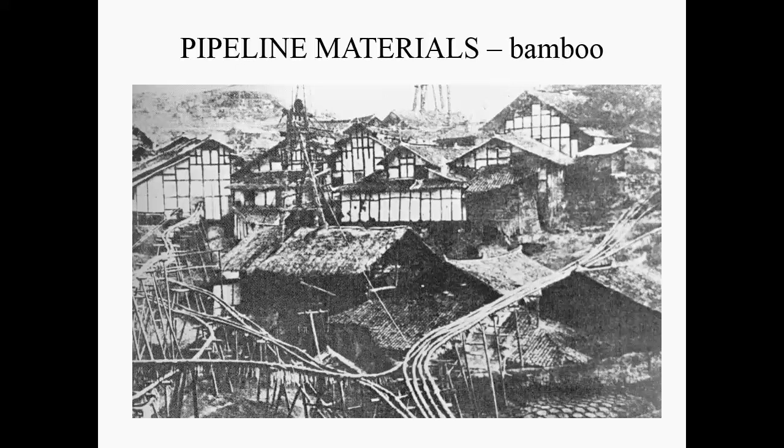Pipelines aren't new. I looked for the oldest picture that I could find, and this one came from a Chinese application a long time ago. This is actually water pipes rather than gas pipes, but it's bamboo joined together just by inserting one hollow section into another. You could make very long pipelines, a kilometre or so. The size of the pipe is just dictated by what you can grow. Bamboo is a very fast-growing plant, so you can get quite large tubes, but large meaning 40 millimetres or something like that. It's not going to be incredibly large.

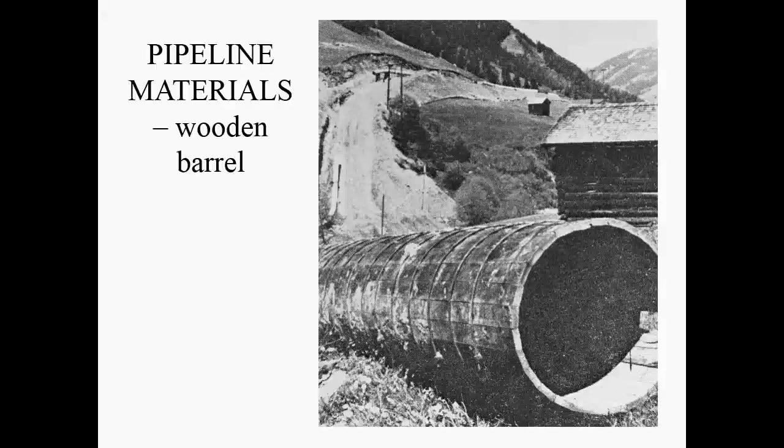The big change to pipelines really was the use of steel. The reason we could use steel is that people learnt how to join steel pipes together by welding. There were cast iron pipes, particularly in the water industry before that. Cast iron is a strong but brittle form of an iron carbon alloy, whereas steel is strong and ductile. You can't easily weld cast iron, so joints tended to be bolted or screwed together, which made it a very slow process for manufacturing a long pipeline, whereas steels can be welded. Steels really started appearing about 100 years ago, and for pipelines at least 70 or 80 years ago, so it's been around for a long time.

But the steels have been developing over a period of time, and what I want to do in this first set of lectures is really talk a bit about how the steel developed, the processing necessary, and how you would develop a material which can then be manufactured into a pipe.

Before 1960, pipes were made from what we call semi-killed ingot cast steels. What that basically means is a technical term for a bit of oxygen left in the molten steel, which was left there because it improved the yield. What happens generally is, if you're reducing iron ore in a blast furnace, you have to take iron oxide and turn it into pure iron. If you spend a long time getting all the oxygen out, you had to wait longer for the furnace processes to take place, meaning you produced less steel per day. So if you decided you could live with a small amount of oxygen in the steel, that would mean you were more productive.

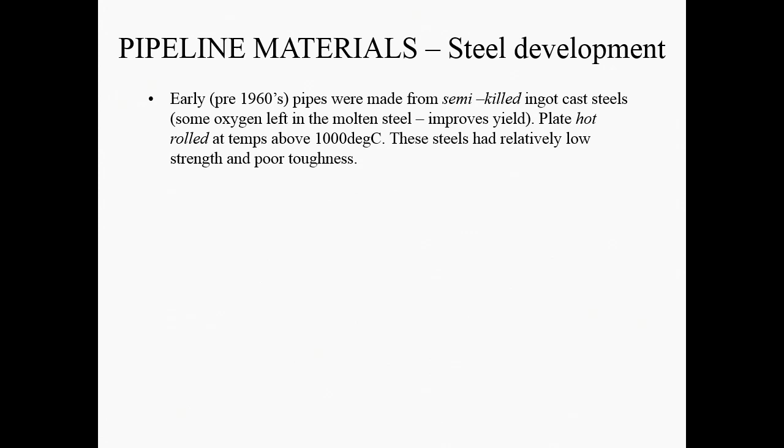Although these steels were better than the other materials being used at the time, they still had relatively low strength because of the hot rolling process and relatively poor toughness. So they were easy to fracture because of the oxygen left within them.

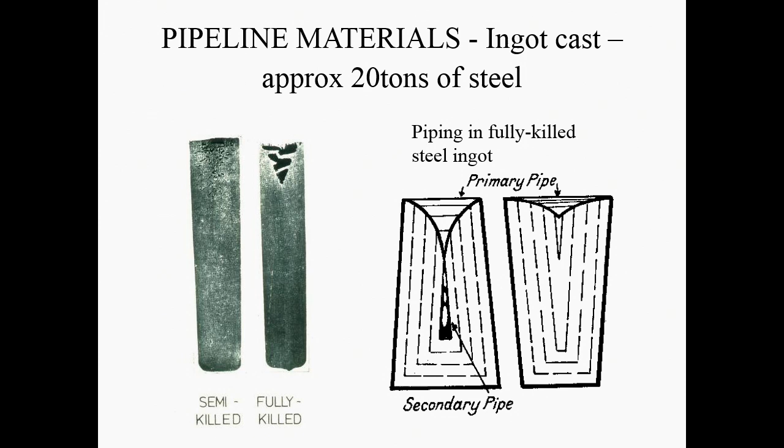You can actually look at these defects, and metallurgists discovered over 100 years ago that if you took a cut section of surface and polished it to a mirror finish with various silicon carbide papers and diamond grits, and then applied a very dilute acid, sometimes an acid in alcohol, you could actually reveal the structure of the material within the ingot.

So what's segregation? Well, in the steel making process, you have molten iron, but it has things like sulfur and oxygen in it, and manganese is added in the steel making process, so you get things like manganese sulfides and manganese oxides and iron oxides trapped within the material. If they were kept in the liquid phase long enough, they would float up to the surface because they're less dense than molten iron, and then they're scraped off in a slag layer.

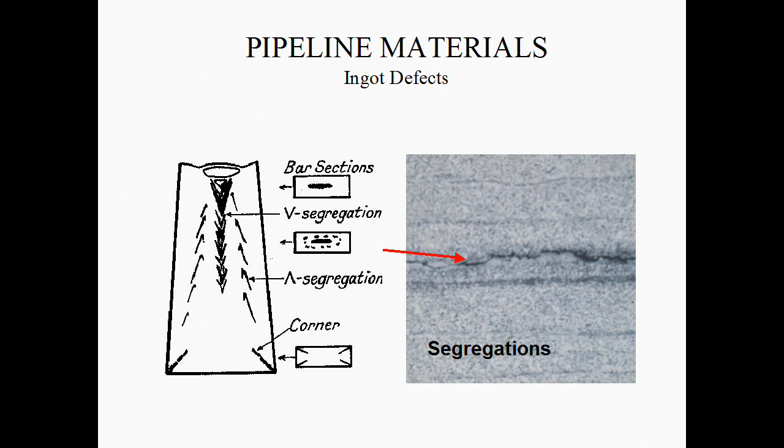So by the 1960s, the quality of steel was recognised as being not good enough because of all of these things left in the steel. And steels were fully killed: to get rid of the oxygen in the steel, rather than relying on the manganese which had originally been used in the steel-making process, small amounts of silicon and aluminium were added. They remove both any excess oxygen, and then they remove nitrogen that might be dissolved in the system.

So to reduce the carbon content of steel, sometimes an oxygen lance blows oxygen at the surface of the steel, and it oxidises the carbon to CO2, which is removed. That's how you go from an iron with lots of carbon, 3%, to a steel with 0.1% carbon.

But if you've got this oxygen lance, you can actually entrain other things like nitrogen into the steel, because it's not 100% oxygen - in some cases it's air that's blown there. And you need some way of dealing with the nitrogen and the remaining oxygen in the system. Silicon and aluminium form very stable oxides - they're very thermodynamically stable, so they will gather up the oxygen quite nicely. Aluminium and silicon also react with nitrogen to form stable nitrides, so they can be reduced by that method as well.

So this is done in the melt, so that by the time you get to casting, or continuous casting - and we'll talk about that later on - the properties of the material have been greatly improved.

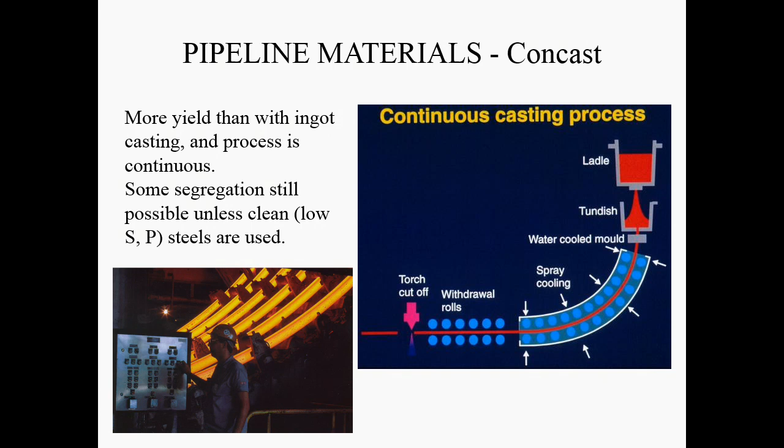So we had continuously produced material of fully killed composition, good strength, but the weldability needed to be improved. So what could we do? Well, from the 1970s, what are called controlled rolled steels were developed.

Controlled rolled doesn't mean rolled at fridge temperatures, below room temperature. It means that hot rolling was over 1,000 degrees C, controlled rolling is less than 1,000 degrees C. So it's cold by molten steel terms, but not cold by normal terms.

A silicon-killed, aluminium-treated and microalloyed steel, usually with niobium or vanadium, was rolled at temperatures down to 700 degrees C. By rolling these steels, you can continuously refine the microstructure and make smaller and smaller grains. These have very high strength and good toughness without having to add large proportions of alloying elements. They have microalloying elements, less than 1%, but not large amounts, which means the carbon equivalent goes down, so the weldability is improved.

So a pipeline steel is not a pipeline steel. A pipeline steel has been continuously changing over the years and will continue to do so, even if it has a particular strength, because the processing of that steel to get microstructures that deliver the good strength, toughness and weldability we need has been changed continuously.

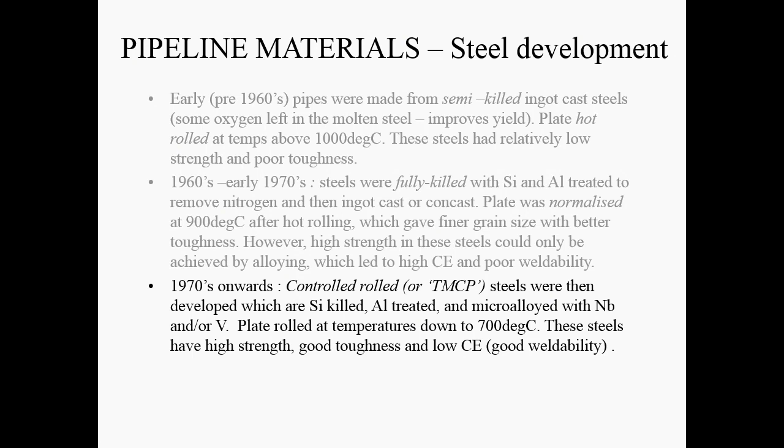And most recently, the hot rolling process has been controlled, the controlled rolling process has been controlled, and we have even put accelerated cooling by extra water jets on the surface to do it.

Hot rolling mill, huge mill. So there's a horizontal roller here and a horizontal roller here. Well, here and here, in fact. And then you can see the plate coming out. So that previous one was a slab. This is a plate. Slabs are about this thick. Plates are about this thick, or less.

And it's big, and it's dirty, and it's messy, and it's heavy engineering.

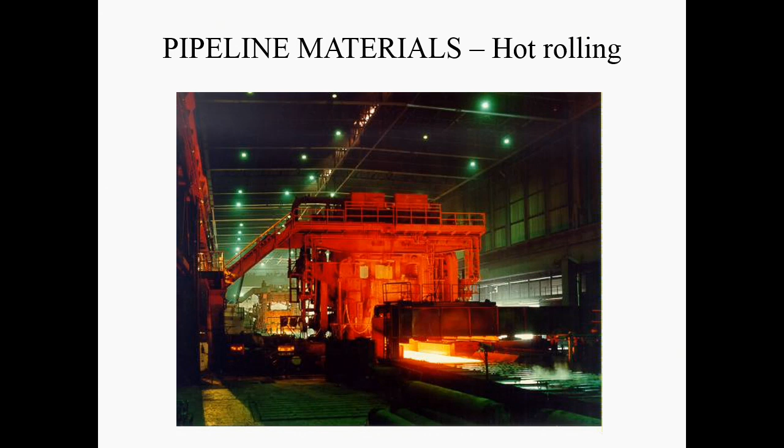So here's the typical process for controlled rolling of steel plate now. You can see we've gone from a single casting and single hot rolling operation to a multi-step operation. Basically the metals industry worldwide has improved process control and added to the complexity so that the microstructural control of the steel is what's needed for the application. You're trying to make a material with exactly the right microstructure for that particular application. That's what metallurgists have been doing really since the 1950s, but the improvements have been gradual over that time.

So we start with a steel slab, about this thick, at least 150 millimetres thick, 6 inches in old money. The slab is reheated to 1200 degrees C, so furnace treatment. How long do we have to heat it? Well, we have to make sure the whole slab is heated, so there's a certain soaking time that you need to put on. Then it goes through hot roll systems.

I've done a cartoon of the grains here. Individual grains are approximately spherical. In the steel, it's made up of individual crystallites with different orientations. The grains are quite large because at high temperature the grains tend to grow.

Hot rolling reduces the grain size. If you put mechanical damage into a material, it reduces the grain size. We get recrystallization events taking place. And we want to have a material with a small grain size because that's a good way of introducing increased toughness and increased strength.

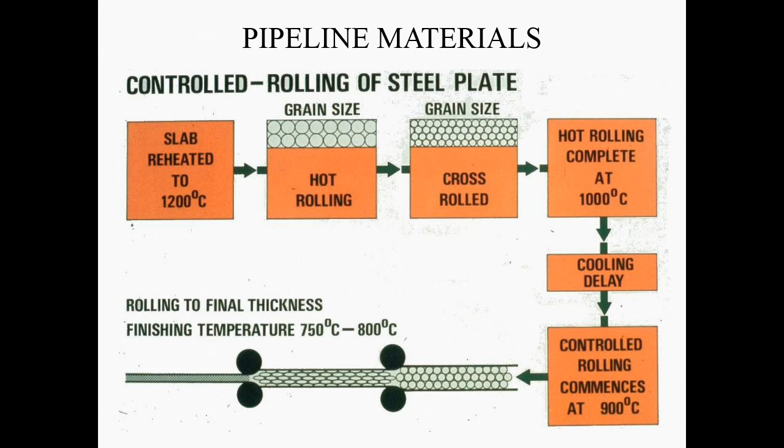So, from the 1990s, to get the high strength steels, that's X70, X80 and higher grades, we needed to controlled roll and fast cool the plate by water quenching. These are sometimes called accelerated cooled steels.

Basically, if you leave a steel at temperatures of 500 or 600 or 700 degrees C, there is a tendency to try and increase the size of the grains. Grains have surface energy, and if the grain size is very small, there's a lot of surface energy in the material, and you can minimize it by increasing the size of the grains. So we try to avoid that process by cooling as fast as possible to keep the small grains that we've just spent a lot of money making.

And when we go above X80, we also have to add a bit more manganese to the steel, and chromium and molybdenum, because we want to get the possibility of carbides forming in the system, and that will give you the higher strength. But then you've got to ask questions about carbon equivalent and weldability for these higher grades. So X80 I've always regarded as the tipping point.

Up to X80 you can improve things by all these other processes and maintain the weldability. If you go much above X80, then the steels are inherently less weldable, but you may need to use that for other reasons in your applications.

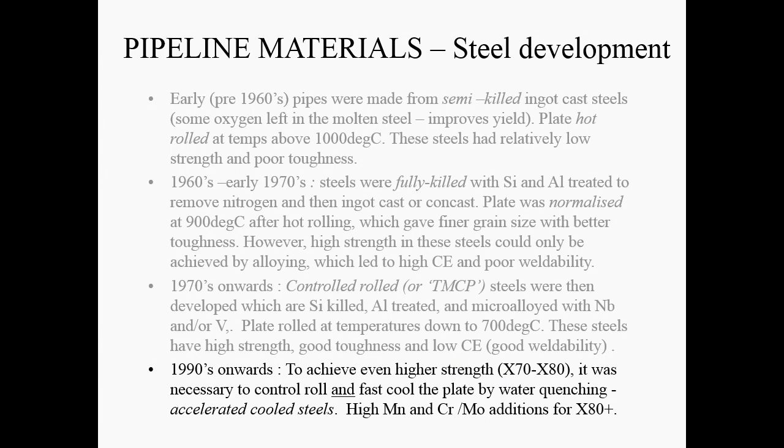So what's the accelerated cooling process like? Well, it's quite straightforward. You have your continuous cast slab, you reheat, hot rolling, controlled rolling, water spray, accelerated cooling, and then once you get down to around 300-400 degrees C, then you allow the air cooling.

Actually, the processes are quite straightforward, but controlling the processes to give you the microstructure that you want, that's less straightforward. And that's the skill of the steelworks.

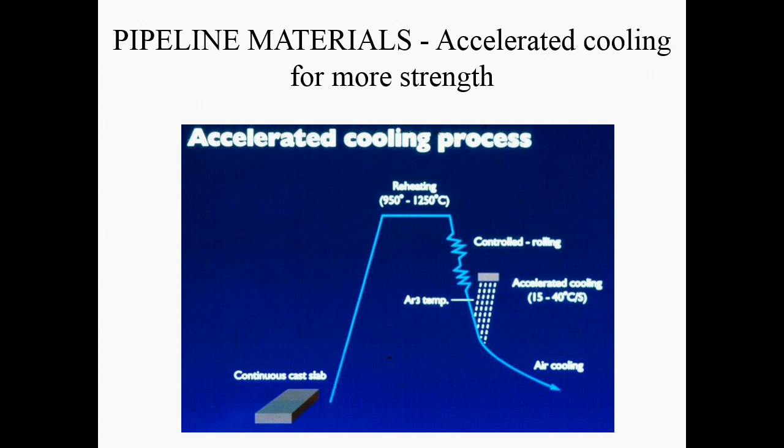So how do we do that? Well, they tend to have these curtain cooling systems. So this is a water spray, and it's like a curtain of water that's going across. And you can see in this particular design, this hot rolled, controlled rolled slab coming out this way, and you've got 10 curtains that it passes through to take the heat out.

And by the time it gets to the end, it doesn't look hot, which is a good way of saying that the cooling is complete. Actually, it is still hot. When you go near that, you'd know that was more than 200 degrees C, but you wouldn't see it.

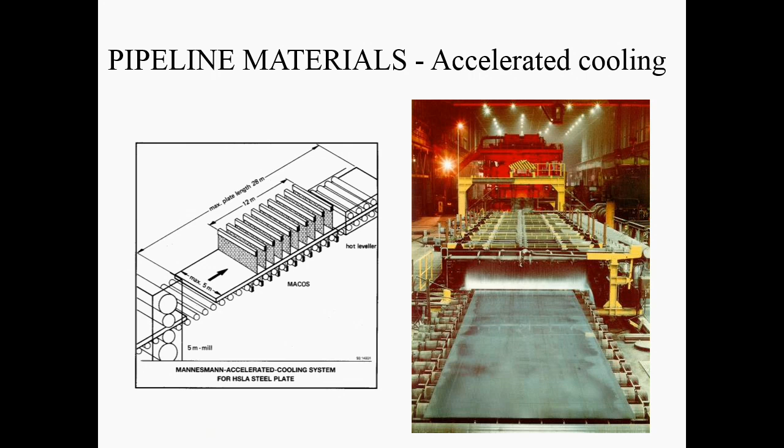Okay, so why are we going through all this effort? Why do we want to make this grain size so small? Well, again, metallurgists have been trying to develop new alloys and better materials for many, many years. And for steels, there are equations empirically developed by taking all of the material parameters that have been measured and all of the alloys that have been looked at and fitting them to equations. So here is an equation for strength.

So the yield strength is some constant plus a percentage of manganese times another constant, plus a percentage of silicon times another constant, plus the square root of the percentage of free nitrogen times another constant, plus a constant times the inverse of the square root of the grain size, and another constant which is a precipitation strengthening factor. So all of these factors make a difference to strength and toughness.

So toughness, and this is in terms of the ductile brittle transition temperature, which we talked about before. Again, minus 19 plus something with silicon, something with nitrogen, again square rooted, minus 11.5 divided by the square root of grain size, plus the percentage of pearlite - we'll talk about what that means afterwards - and 0.26 times the precipitation strengthening factor.

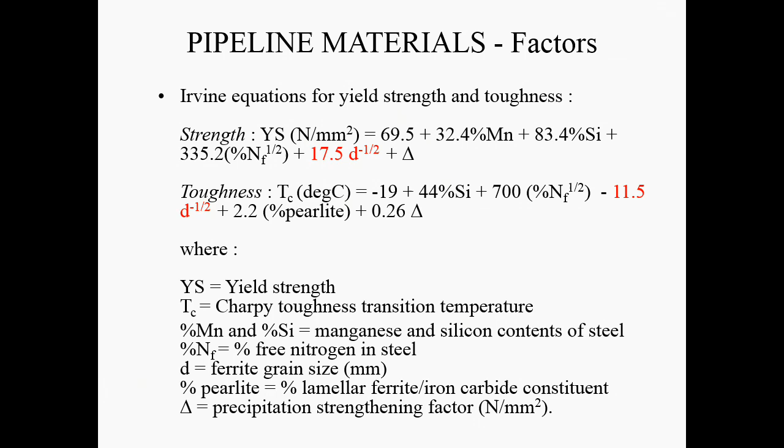But the point about this is you can increase strength and you can increase toughness by making the grain size small. So that's why grain size control has been so important. So we maximise equation 1 by minimising equation 2, and we want the factors that benefit equation 1 having a negative effect on equation 2, and that's the small grain size.

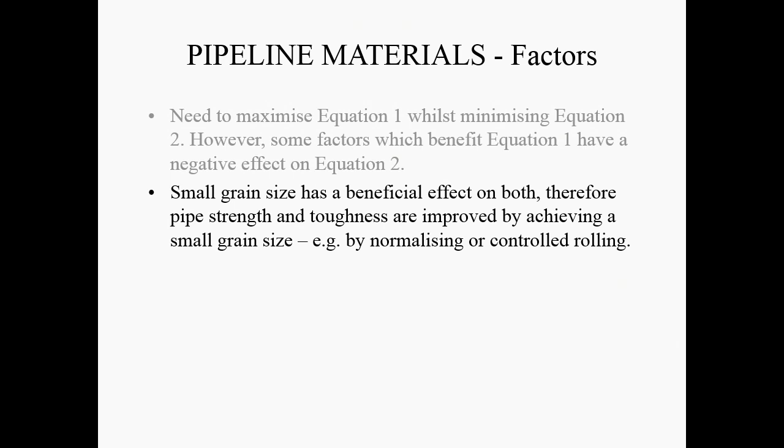So pipe strength and toughness are improved by achieving a small grain size by normalising or controlled rolling. So if we can achieve the strength and toughness we require without adding alloying elements, we also can do that without sacrificing weldability.

So this is like the holy grail for the pipeline industry. We want to have strength, toughness and weldability. If we can achieve that just by making the grain size smaller, we're not adding any alloy elements, so we're not adding cost. We're not changing the material properties and the microstructures and everything. So we've got no real problems when it comes to qualification because we still have the same materials. And so it's a very, very important way to actually go ahead.

So small grain size is good. Smaller the better.

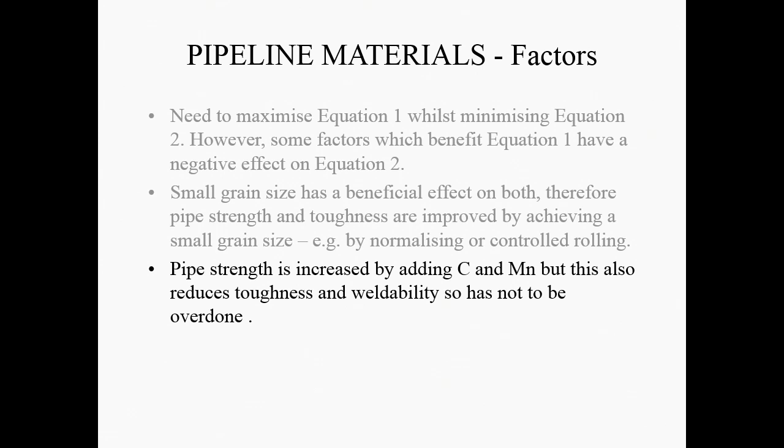So the pipe strength is increased by adding carbon and manganese. And some of the higher grades, they do that. All mild steel, every piece of steel that you get has carbon and manganese in it. Manganese is added in as a deoxidant in the steel making, and carbon is there obviously to give you the strength that you want. But you don't want to put too much, because both carbon and manganese will reduce toughness and weldability. So you have to have some carbon and manganese there, but you don't want to put too much.

Microalloying was developed by putting precipitation elements in that can combine with carbon and nitrogen to form little precipitates, which also increase strength. If you put very small quantities of these elements in and have very small precipitates, it has a small effect on toughness and weldability, but a big effect on strength. If you put too much, then it's a problem - that's why we call it microalloying. These are added at the 0.02%, 0.03% level, not at great percentages.

By the way, as we're talking about metallurgists here, that percent is weight percent, not atom percent. So all alloy designations are in terms of percentage by weight, not percentage by number of atoms. So I will only ever talk about weight percent in this course.

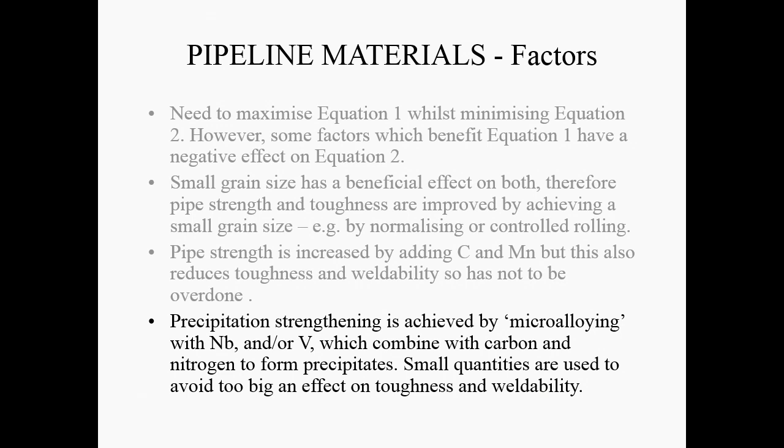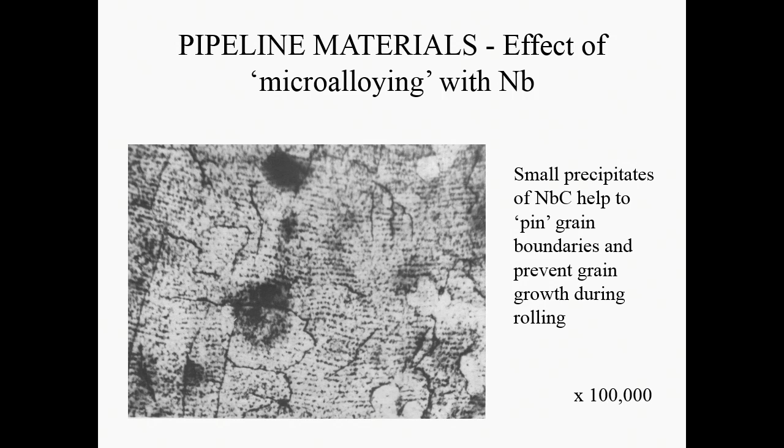If you go too high in temperature, the grains will grow because niobium carbide will dissolve. So this really only occurs at the bottom end of the rolling range, i.e. in the controlled rolling range. So we stop grain growth from taking place by these carbides, and that also allows us to get grades above X80, so X100 and things like that.

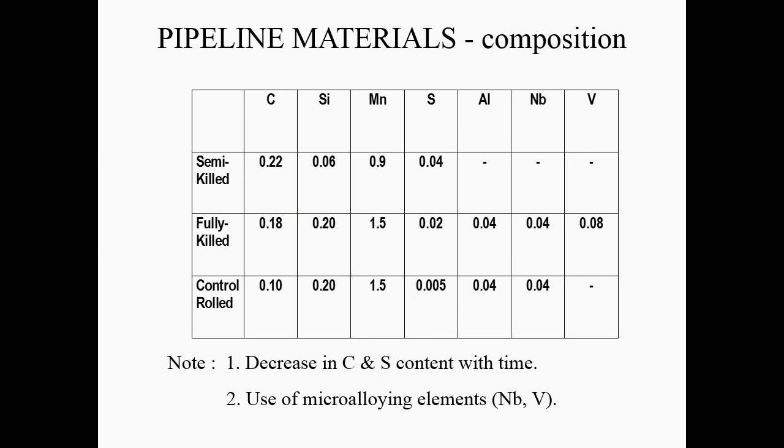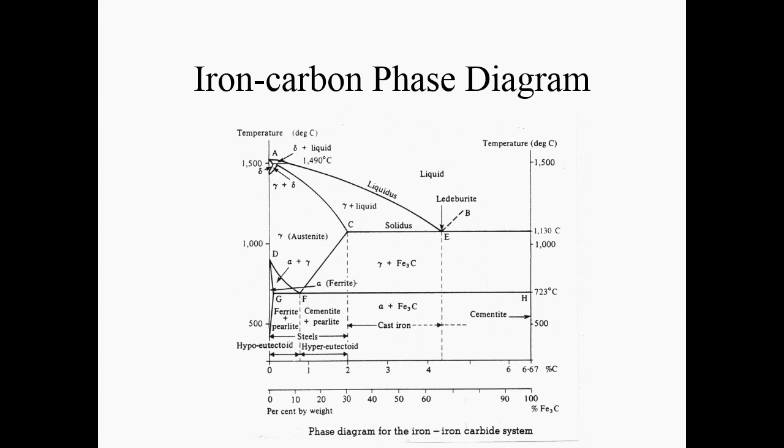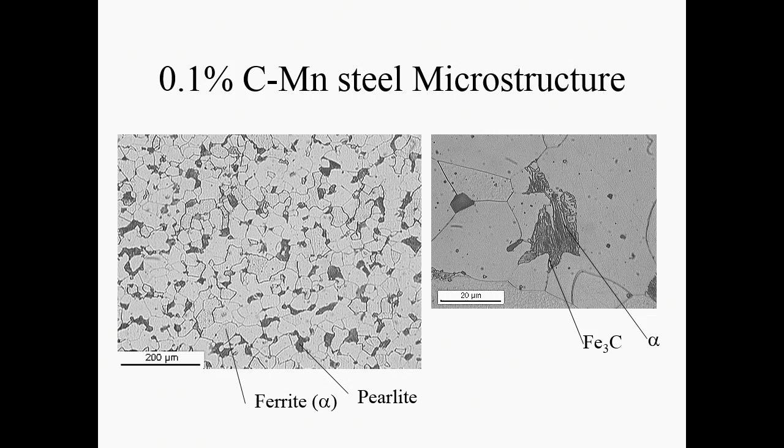The other thing you have to worry about is what happened to all those nasty elements that you didn't want to deal with. So what happened to the sulfur? Do we remove it in the steelmaking process? Does it float up to the surface and get scraped off with the blast furnace slag? Well, no, unfortunately it doesn't.

Alumina, aluminosilicates, again, blast furnace linings and the insulators used in the steelmaking process, so you can get them throughout the steel. They've been managed - the sulfur on its own would be bad, but if you put manganese in and get manganese sulfide, that makes the sulfur's effect smaller. It doesn't remove it completely, but you're managing the impurity in that system. And that's what you do.